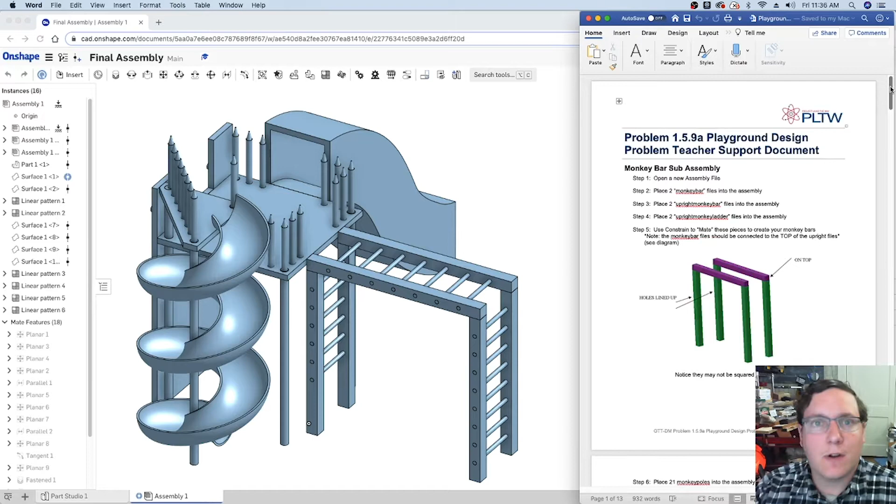So we're going to start off with some notes about the assembly document itself. We've been working our way through this with the subassemblies of the different main components, and while we've largely been able to follow those instructions, we're getting to a point where the assembly process for the final portion in OnShape is going to be a little bit different than what we've used with Inventor. Some of the commands are a little bit different, and some of the order of operations may have changed a little bit.

So again, I'm doing my best to go ahead and use OnShape for the final assembly, and I'm still going to keep the document up because it does provide us with details like the offset distances and the general layouts that we need to follow. So even though the constraints may not be the same, the general process will be, so just be mindful of that as we move forward.

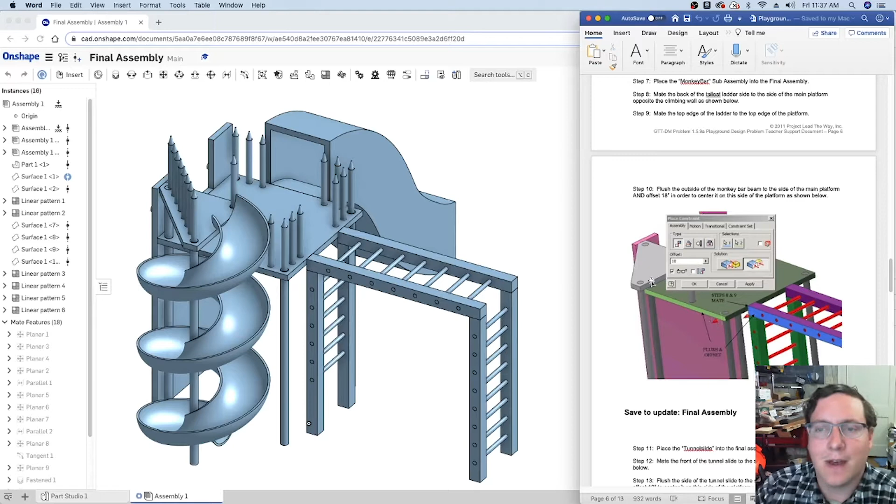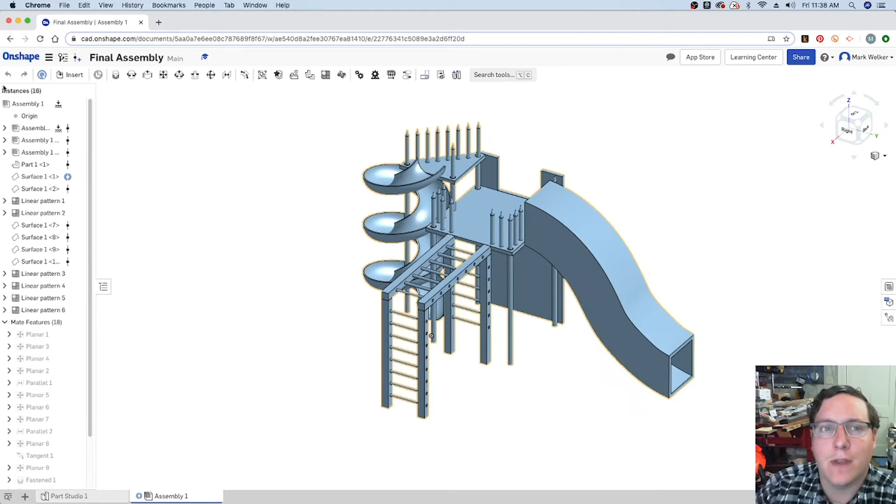As you can see, I've already done one run, and it does take some time. I think one of the things I'm not a big fan of in OnShape or Fusion 360 compared to Inventor is the assembly process is a little bit more finicky, a little more problematic. As you can see, we've been able to go ahead and do the full layout. We've got the crayon poles, all of the pieces are pretty much locked in place, but we're going to try and cover what needs to happen for that to go ahead and make progress.

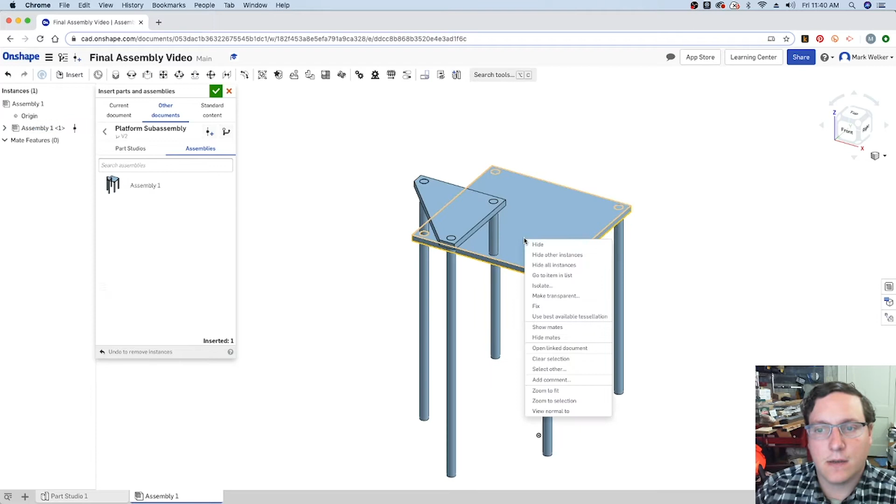So I've already started an empty document for the final assembly for this video. We're going to go ahead and start adding in our parts. Remember that we're going to go into the playground project, grab the platform subassembly, place it, right click, fix it in place, and then we're going to step back and grab the wall subassembly to go ahead and place that component next. Now we'll add other subassemblies as we proceed forward, but this goes ahead and gives us a good starting point.

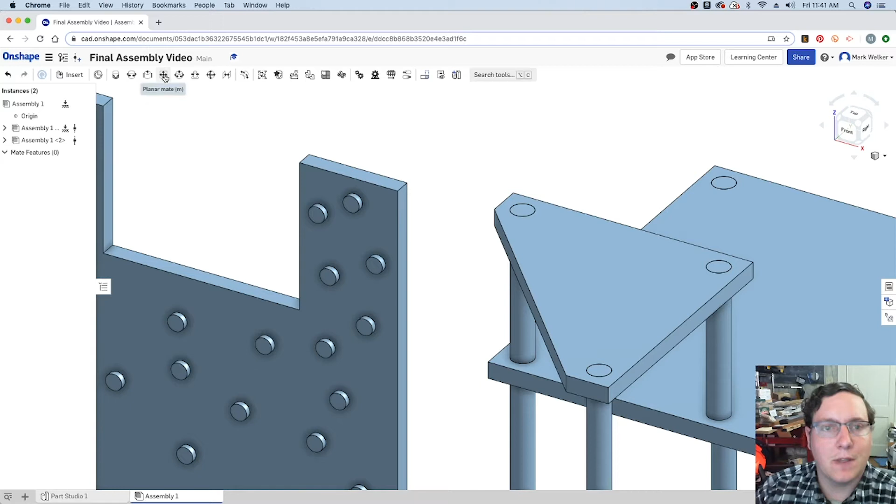So the first constraints that I think I'm going to use are mostly going to be the Planar Mates. So we can grab the top section and go ahead and line it up with the platform. Solve the problem, check your orientations. Sometimes you can flip it around, and it's going to move things for you.

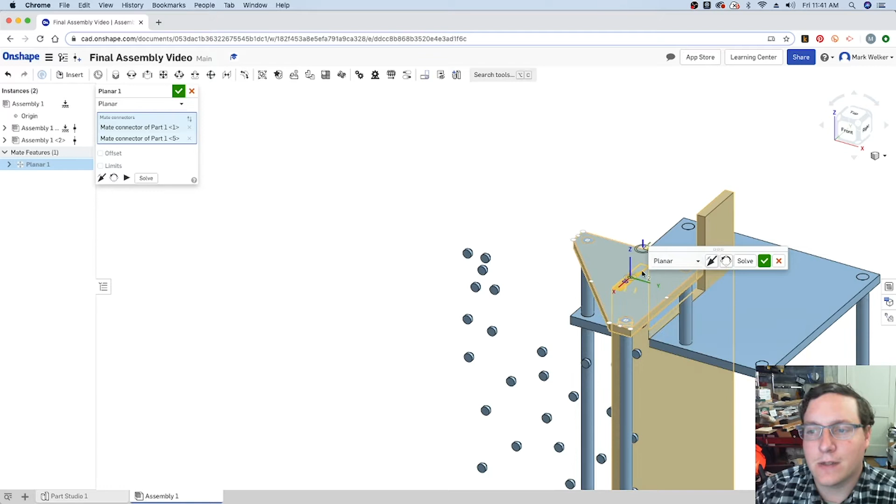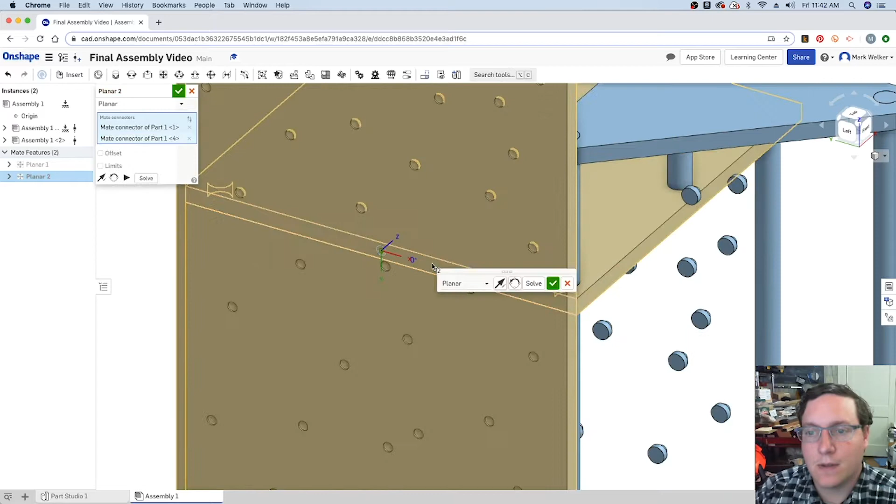I'm going to go ahead and start setting it up so it's easier for us to proceed forward. So we solve, it rearranges some of the other sub-assembled pieces, and then we can go ahead and say that I need the back of that platform to be flush, or at least joined up to that edge of the platform. Let's see if we can solve it. It goes ahead and rearranges a little bit, and let's see, we're not quite there. Okay, actually, are we? Yeah, that looks like it's pretty much set up.

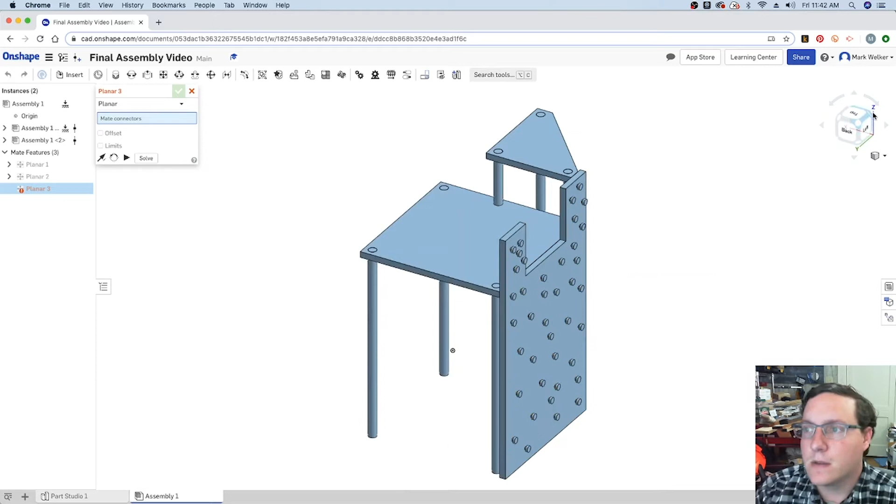Okay, so go back to our primary home view, and we'll go ahead and close that up. One of those things to make sure you're checking is click and drag to see how you can move the part. In this case, we were able to move the part, so we're actually not quite finished.

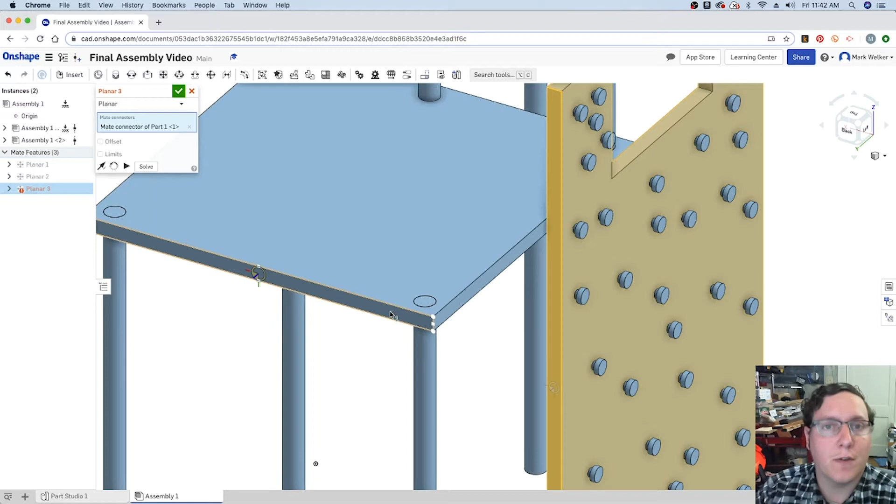Okay, so one more planar mate. We've talked before, ideally with your planars, with all of your constraints, you're usually having to deal with all three directions. Let's see if we can solve this, have it work out. That's looking good. We can now escape out of that, click and drag, and that is now fully constrained.

Okay, so get back to our home view. We'll go ahead and save this because, as I've mentioned, there are problems just with these assemblies. So make sure you have a point where if it really goes wrong, you can escape out, not save it, and go back to the previous versions. The history that they provide us with is going to be really useful when you have those issues pop up. So rather than having to undo or just start over from scratch, you're able to go ahead and step back to where you knew it was working.

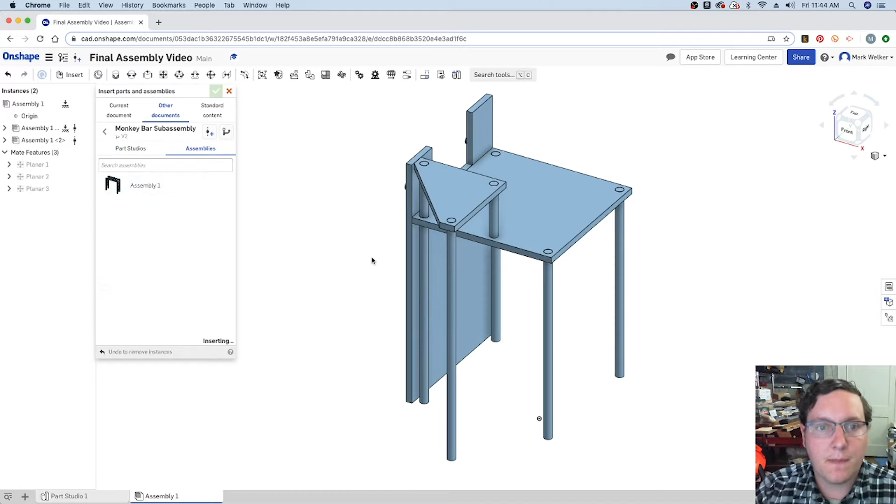So with the wall taken care of, let's go ahead and step into grabbing the next piece. So out of the playground project, let's go ahead and grab the monkey bar assembly, and we'll place it.

We're going to repeat the process much the same way we did with the wall, except there's going to be a little difference in terms of getting it centered. So we'll start off with planar — top of the platform we know is going to get parallel in line with that. Solve, make sure the rest of the assembly is doing all right.

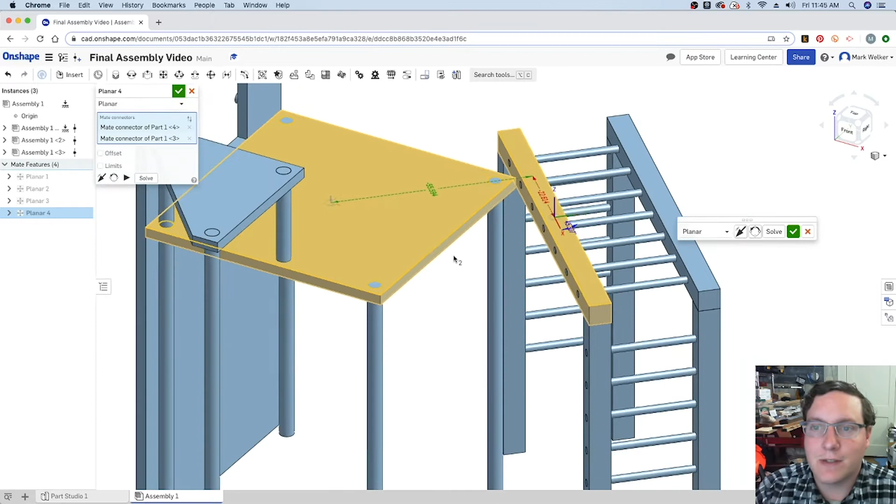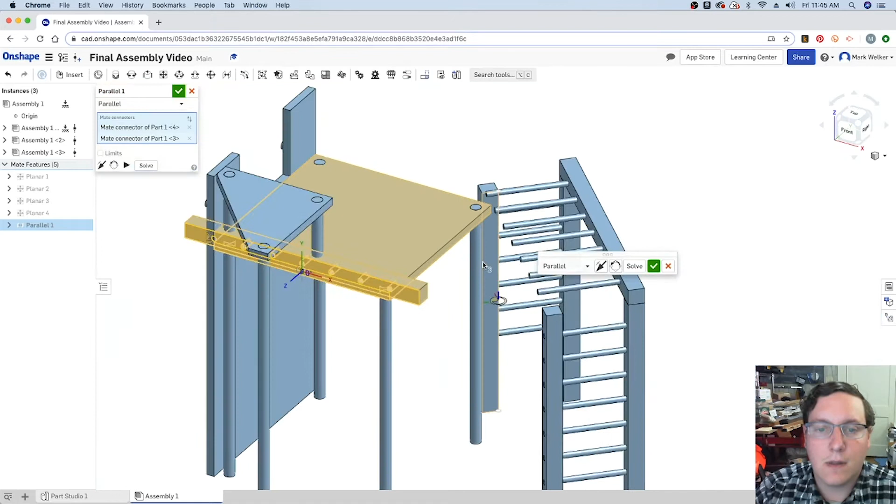In this case, I'm okay with this because one of the next pieces we're going to use is actually going to be the parallel mate. So parallel, we want this edge, the forward edge, to be parallel to the monkey bar itself. We'll try solving that, seeing if that works. And what that's going to let us do is deal with some of those distances — we can tell it what offset we want in this circumstance.

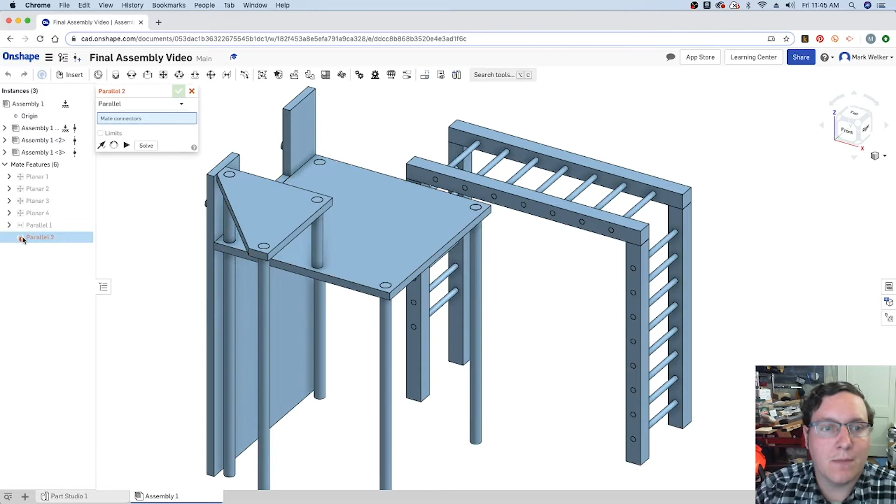I'm going to come back to that one in a minute. The last one, the planar mate, we know we need to have these edges touching this edge of the playground. So we can solve, we can go ahead and check — that seems to be working right.

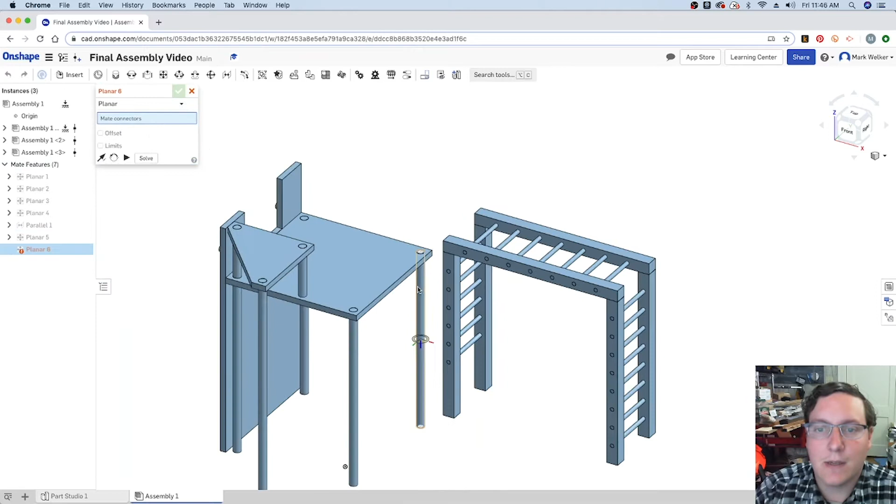And then we can go back and actually change the dimensional distance. So where that's going 82 inches across, going past the platform, we can now tell it that that's only going 18 inches. One of the details in the technical drawings tells us that is now going to pretty much center the monkey bars to that platform.

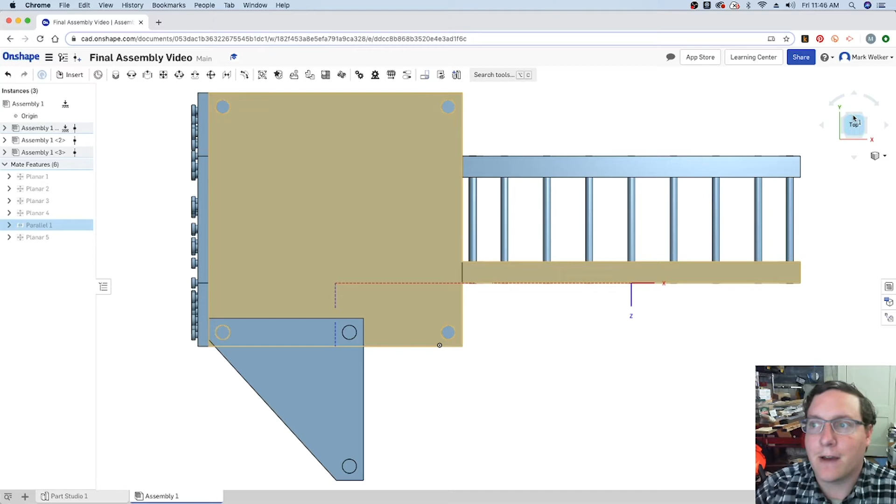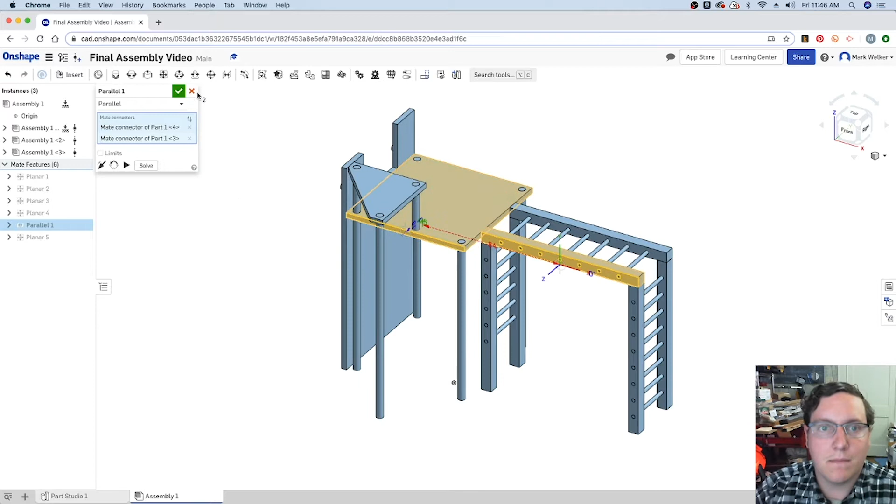So, as before, go ahead and save a current version. We know that's going to hold us in place. And that monkey bar, again, that 18 inches — may make sense to go ahead and lock that in place in other ways, but knowing those distances is going to be a good starting point.

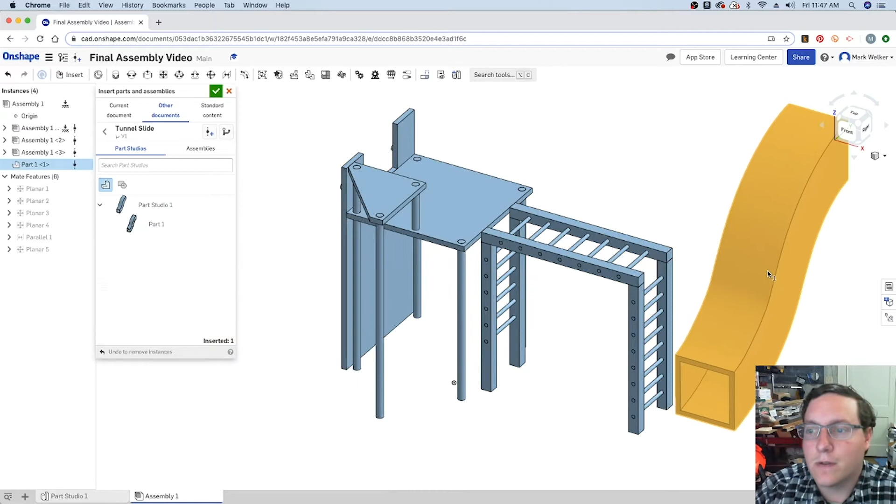So, next up, in terms of our files, let's go ahead and do the tunnel slide. Let's place the part. It's going to be a little bit backwards from what we actually want, but we can go ahead and start applying the constraints and let it do the work for us.

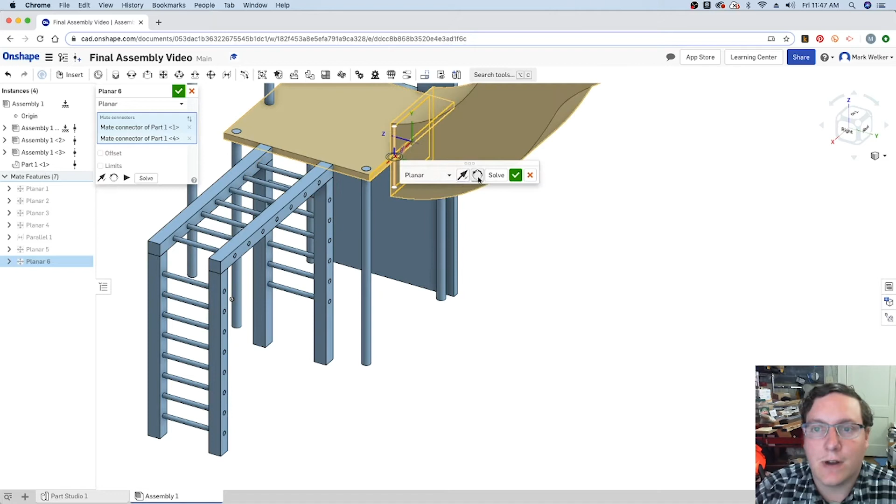Again, our planar tool — I think that's one of the main constraints I'm using for a lot of this. We can tell it to snap in place, change the direction. Now keep in mind, once you've got it kind of glued together, you still need to take care of other orientations, so give it some guidance. It's not quite as intuitive as Autodesk Inventor can be.

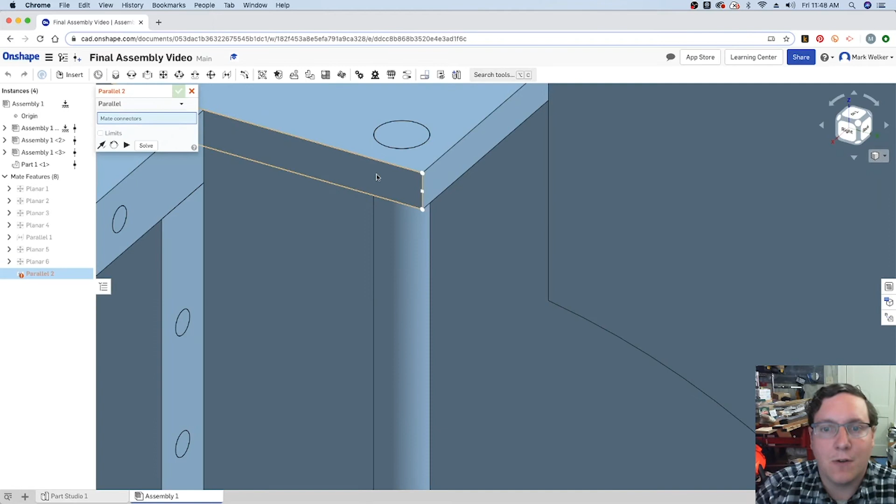So we've gone ahead and put that in place. We now need to take care of a couple of other factors. So like the monkey bars, we want it to be centered. So with the dimensions we provided, grabbing a far edge and that, go ahead and solve.

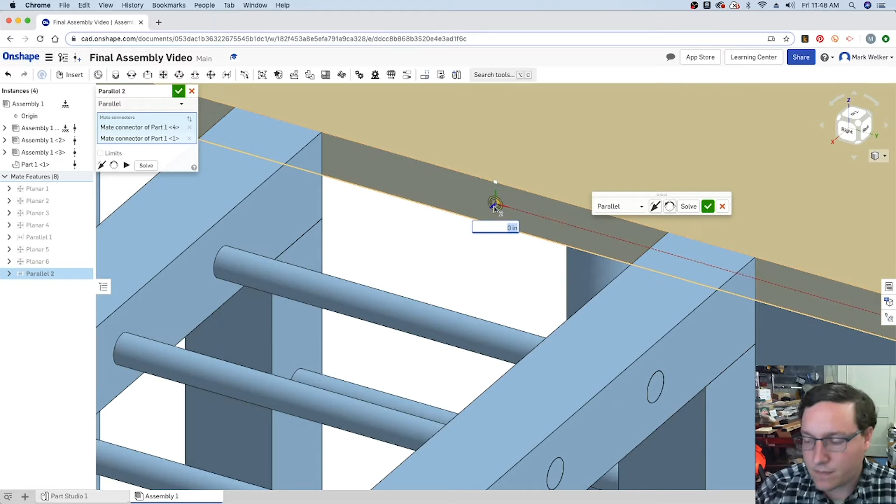Set that to 18 inches as well. Hit OK. And then what's left, we can look from the top view and we can see that that's centered. But as you notice, it's still a little separated from where it should be.

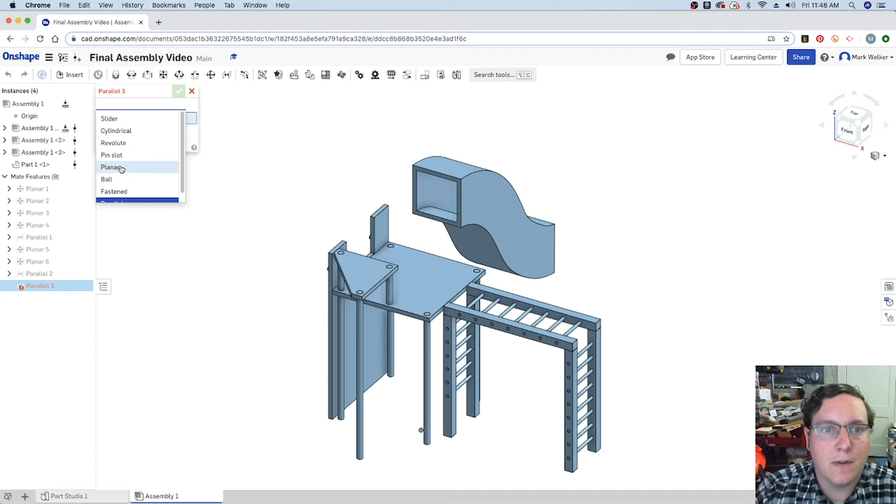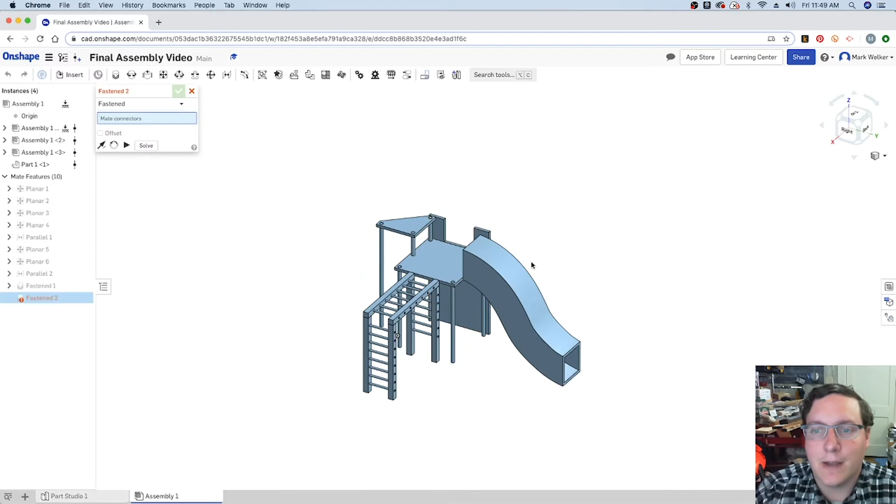So for here, let's change up to — I think the fastened constraint is going to help me out the most. We'll go ahead and grab the bottom edge and then tie it to the bottom edge. This is a little bit more powerful of a constraint, but as we solve that, we should now be able to hit escape, clear out the tools. Notice we can click and drag — it's not moving.

So once again, save the file, save the version, and then we're going to go ahead and install, or at least input, the last of the main components with the spiral slide.

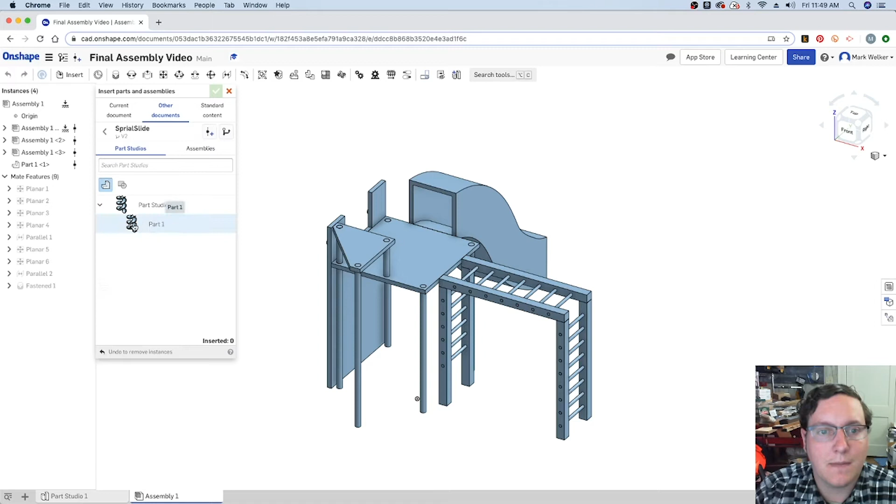Now, from what I was working with earlier, I think the spiral slide is going to be one of the more challenging ones to get everything to line up. So where we'll start is the same way we've started before.

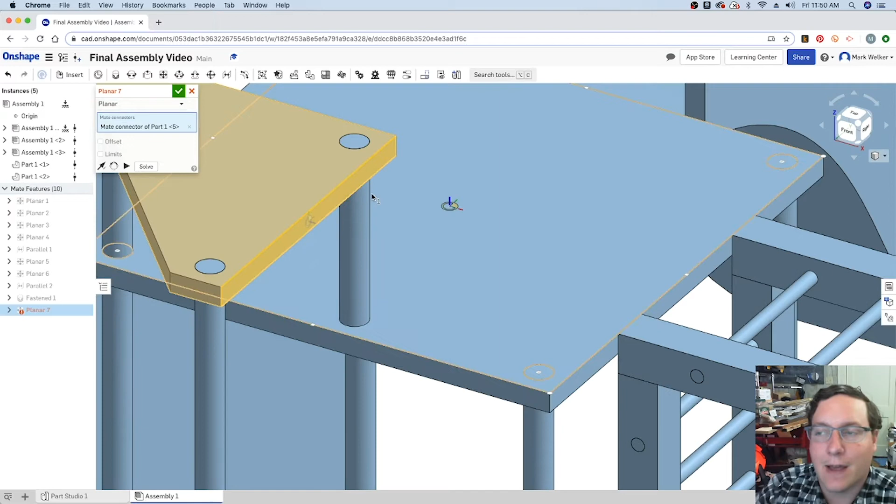We'll grab the planar mate. We'll tell it that I want it to connect from that flat edge of the upper platform, rotate around until I can see it, to kind of the front lip of the top. Okay, so solve. It looks to be holding into position. We'll go ahead and lock it in there.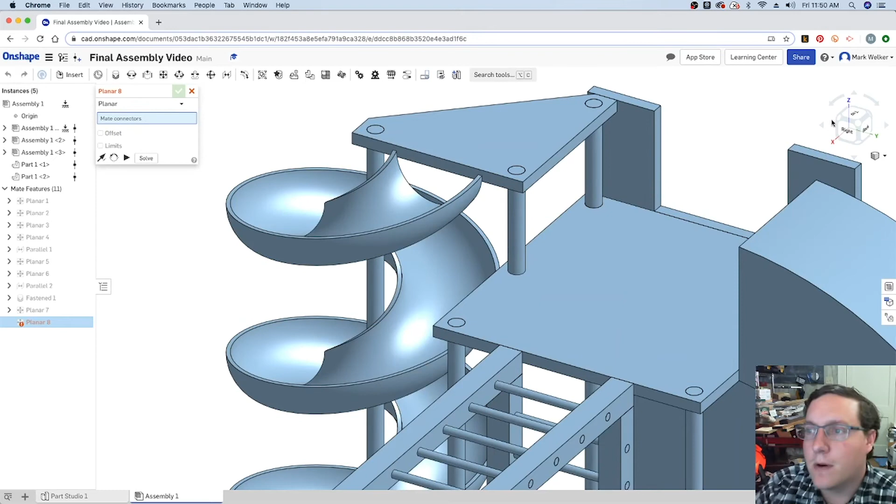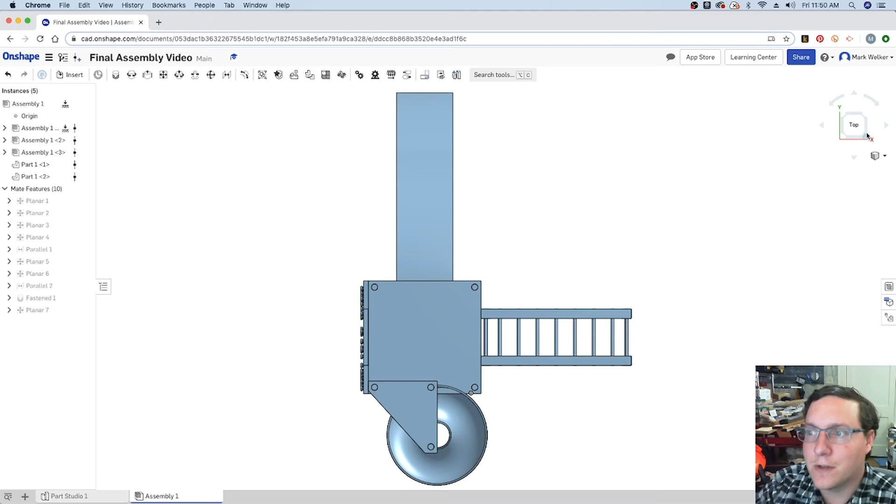But what's that leaving us with? We escape out of the constraint. We've got a lot of movement we can still do. Now we look from different angles. We can see we can move it back and forth, up and down from that orientation. And we can't move it left or right, so that first constraint we put in is doing its job. But we can also see that we're moving up and down.

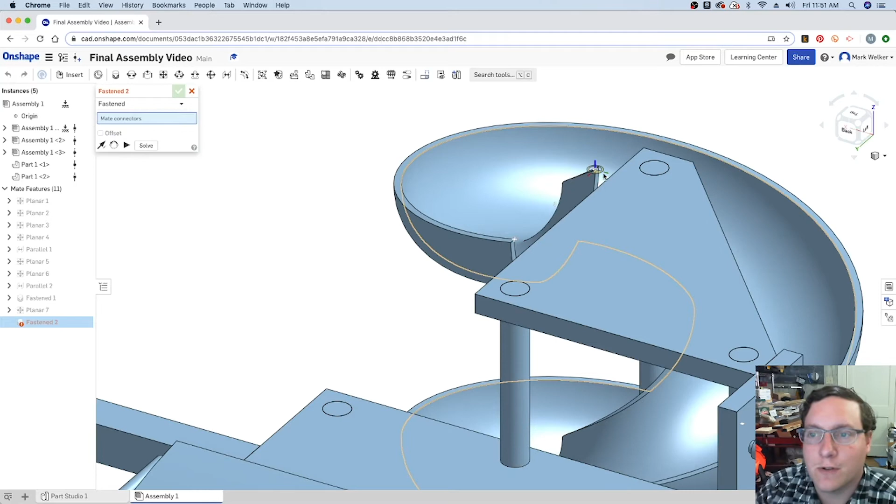Now, just because of some difficulties I've been having with this, what I've been doing is actually using the Fastened Mate, because it allows me a little more control in terms of the offset. So we're going to grab that. We're going to tell it to go ahead and constrain to there.

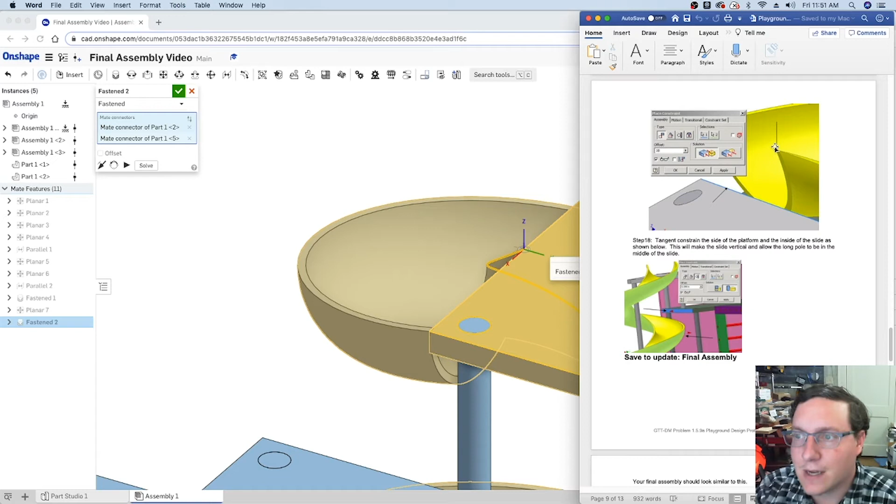And then I'm doing a couple of things. One of them is in the Word document. When we go down to that, we can see it tells us that the offset from that top edge to the platform itself needs to be 10 inches. So offset, pay attention to your orientations. We know that that's going to be 10 inches.

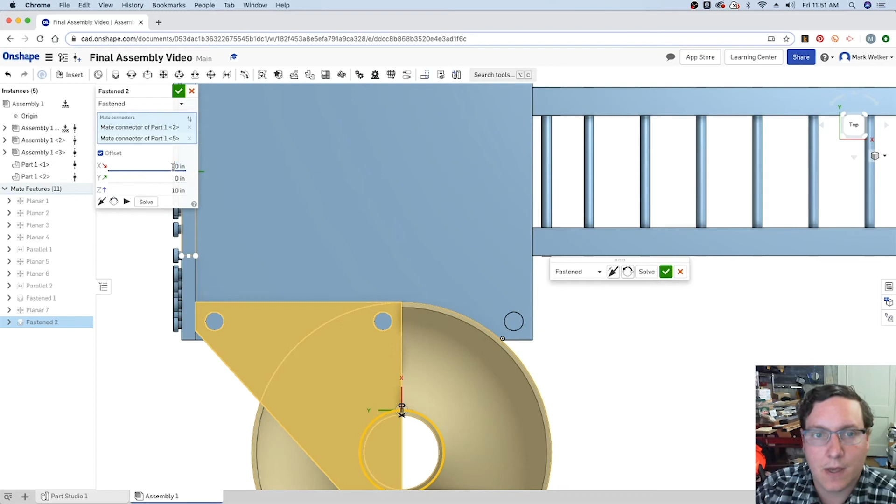But then I'm going to switch to the top view, and we know that we don't want the slide going ahead and rolling through that platform. So we're going to change our X dimension. We'll say, let's try it at 10 inches and see what happens.

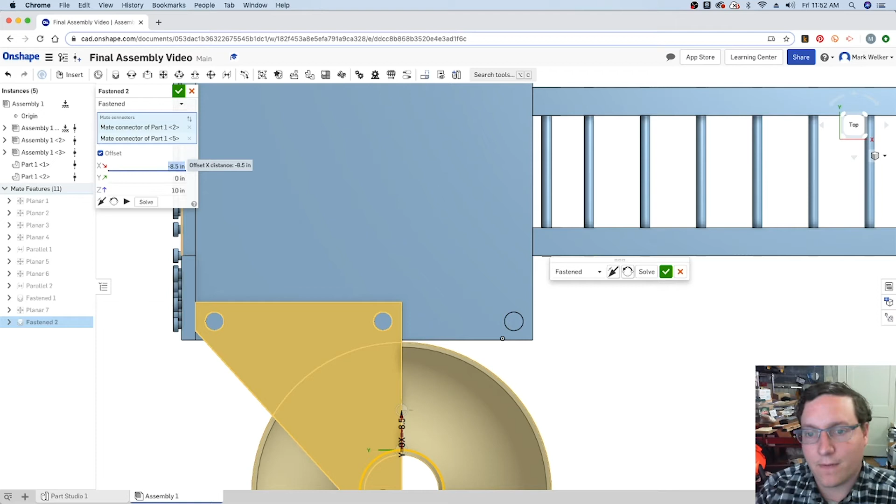So that's obviously going in the direction we don't want. Change it to a negative value. We're getting closer. But I had to go ahead and play around with this some. I think I ultimately settled on 8.5 inches is enough to go ahead and give us that clearance, so it's not going to be affecting that.

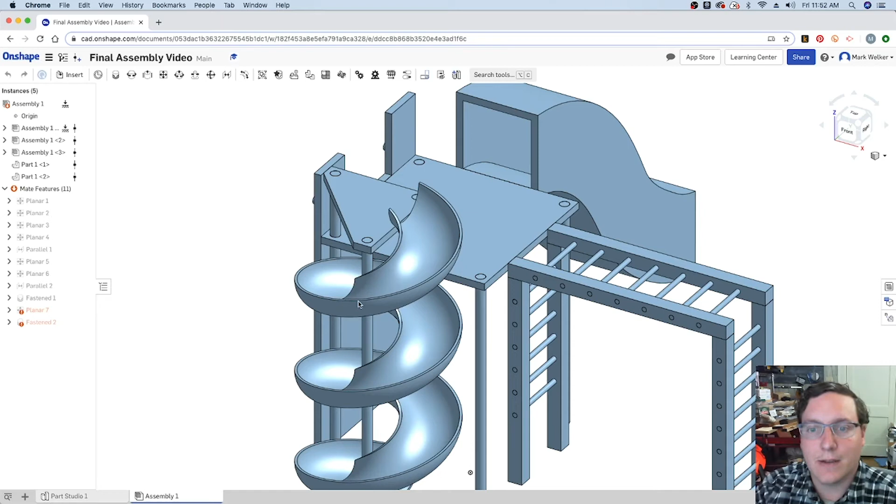We'll go back to a regular view, look at it three-dimensionally, and have that solved. I think that is now pretty much holding in place where we want it. Notice, click and drag, it's not moving. So, as always, save the work, make sure you're keeping track of it.

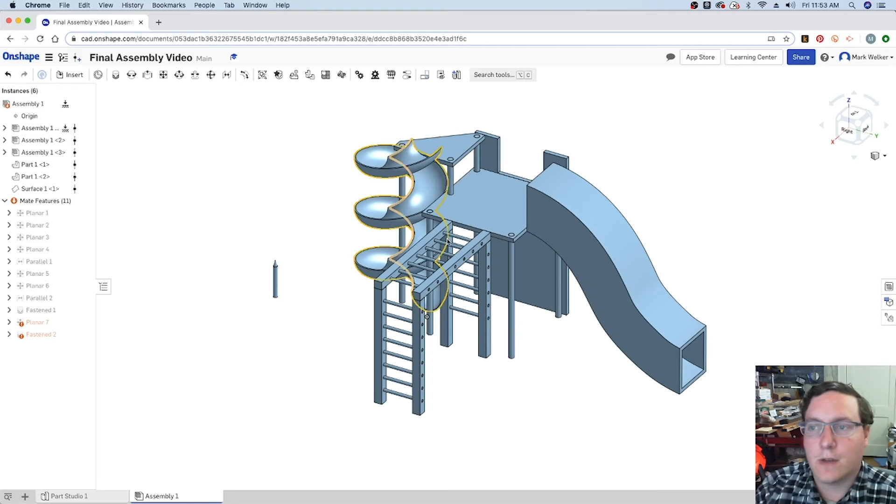And I'm actually going to place several of these. Actually, we'll just start with one. So make sure that it's good. And this is where I'm going to go ahead and use the fastened constraint to help us put it in the corners where we need those poles to be at.

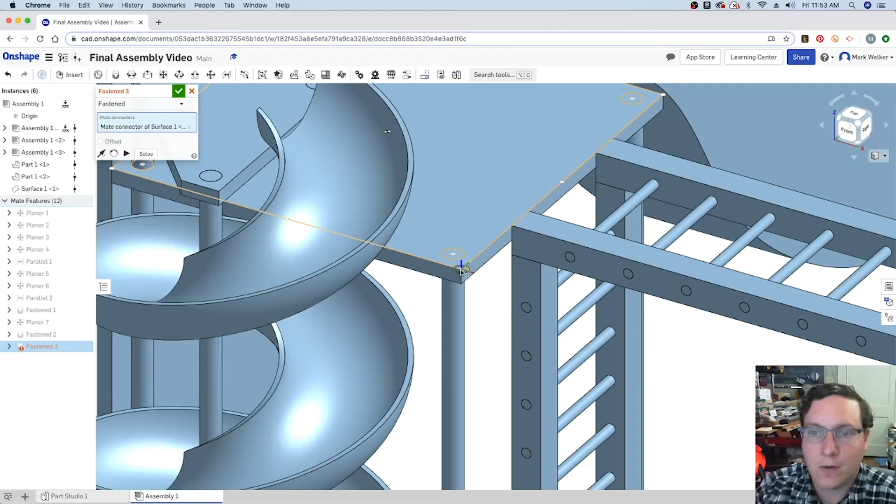So going in, grabbing the center of the bottom hole, or the bottom surface, and then I'm going to go ahead and reference it to the corner of the platform. From there, I can go into the top view, I can edit the offset, and when we go into that Word document, we know that we need to get it 4 inches in both axes. So we pay attention to X, so negative 4 inches to shift it to the left, and then 4 inches to go ahead and get it centered on the right.

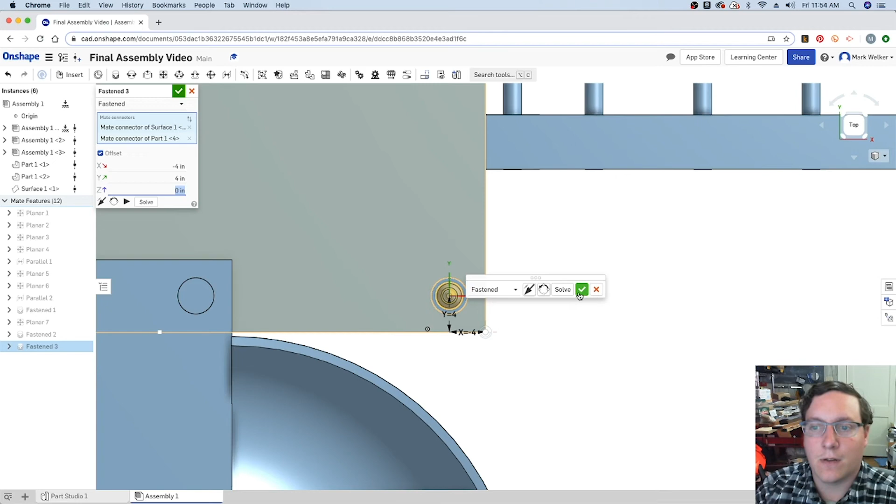When we look at our isometric view, we can see that it's in line because that Z-axis, the bottom of that pole and the top of the platform, are fitting together.

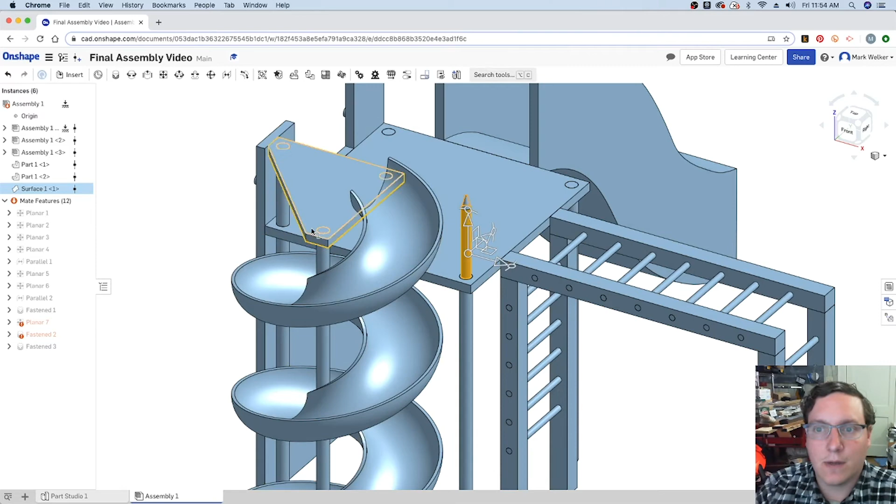So before I start doing some copying of it, before I start using some of the duplicate tools, I'm going to go ahead and copy this. So right click, copy surface 1, since that's the file name for it, and then I can start placing a few of those just by pasting it. So what we need is one in that corner, one in that corner. We'll need one along that edge, and one is there. So we still have to add 1, 2, 3, 4 of these.

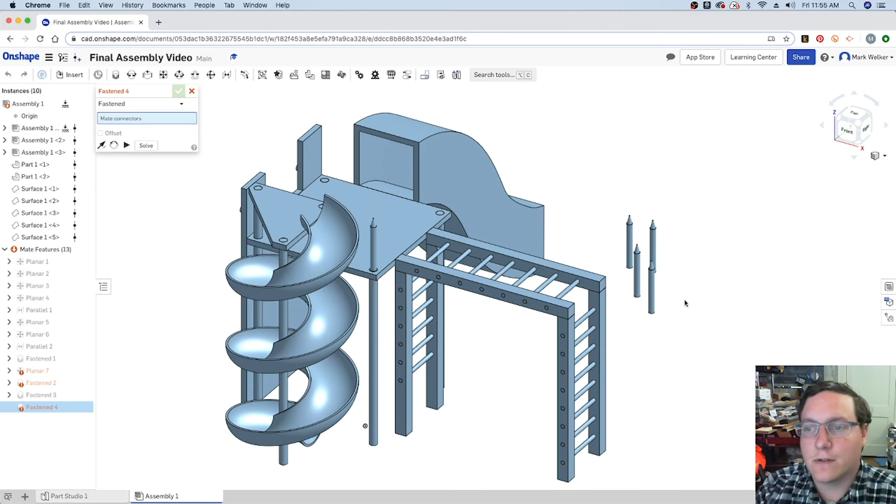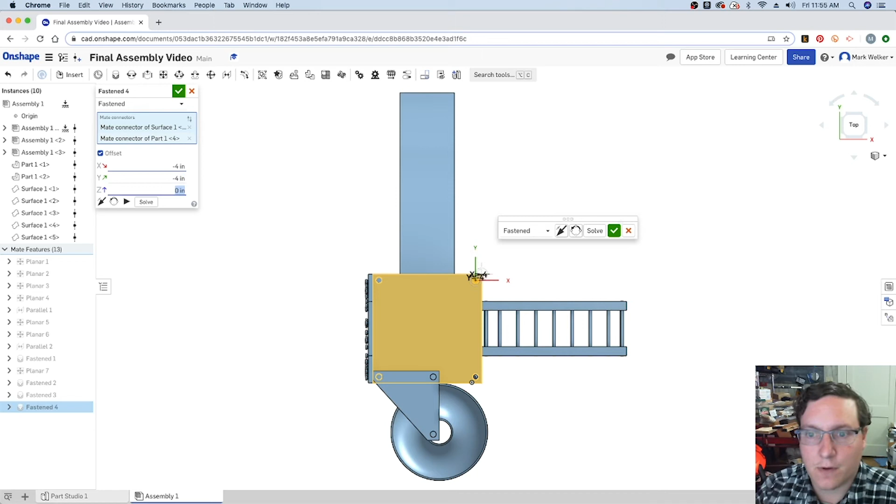Alright, so I'm going to go ahead and apply the same constraints. We're using the fastened to grab the bottom of the pole, go back to an ISO, place it in a top corner. Set the offset, paying attention to your axes. So in this case, we need negative 4 inches, negative 4 inches to go ahead and put it in position.

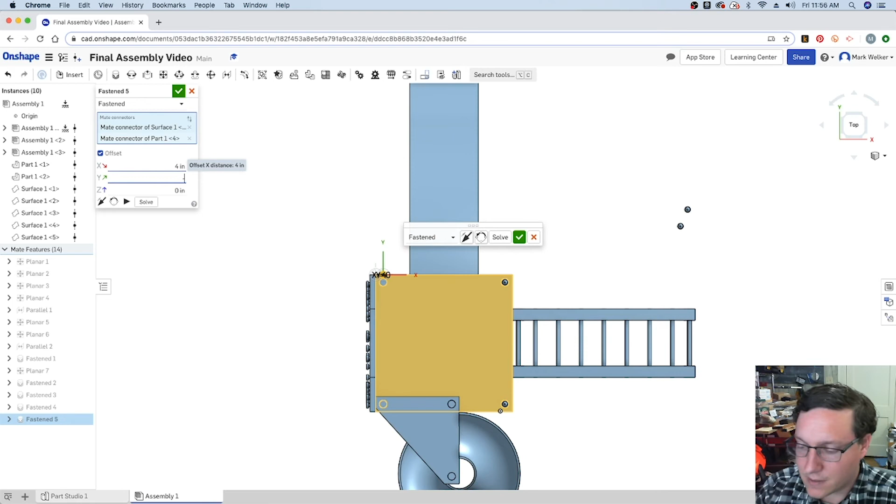Checks out, we can go on to the next one. So mate, pressing M to go ahead and use a shortcut. And again, keeping track of the offsets that we need. In this case, X needs to be 4, Y is -4. Okay, we can solve it. Looks good, we're able to go ahead and move forward to the next one.

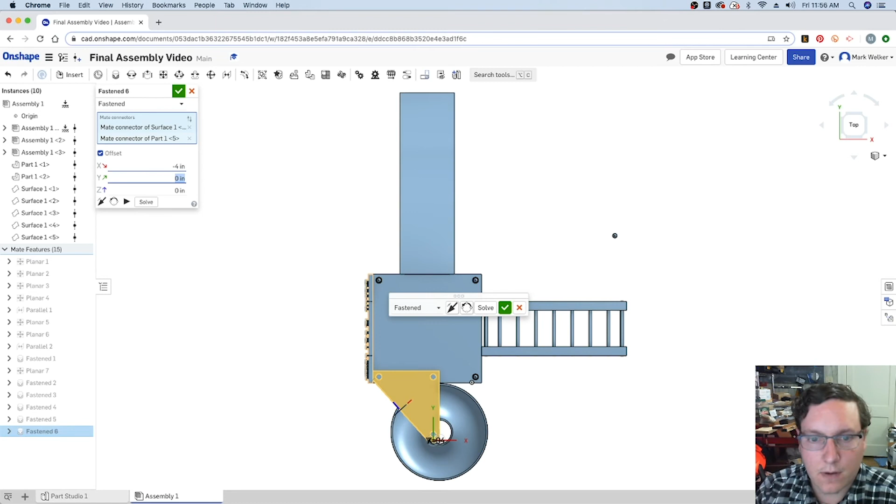Okay, so grab the mate, grab the bottom, hit the corner, and check your offset. In this case, X is -4, Y is 4, okay, and we're able to go ahead and move forward.

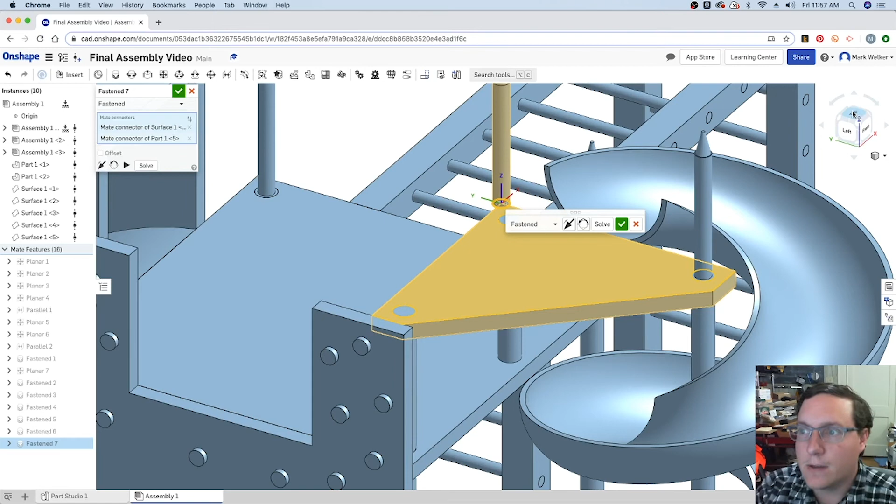Last one, grab the bottom, switch up, and change the rotation a little bit so I can get to that corner. And then using top, again, pay attention to your orientation and your directions. For the offset, -4 and -4.

So with poles placed in each of the corners, this is where we can go ahead and start using the assembly patterns to go ahead and set the directions. So I grab it, the instance is the first object we want, direction, I'm going to go ahead and use the lines that are already created.

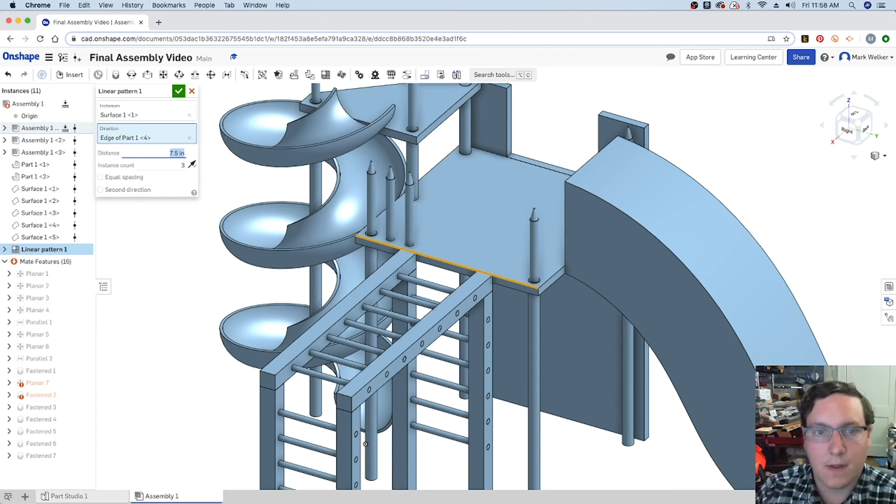According to the documentation, we need 7.5 inches of spacing between the poles. We can change the direction, and I'd say let's try 3 poles at that location. That looks good. And then we're basically repeating the process along all of the axes that we're going to care about.

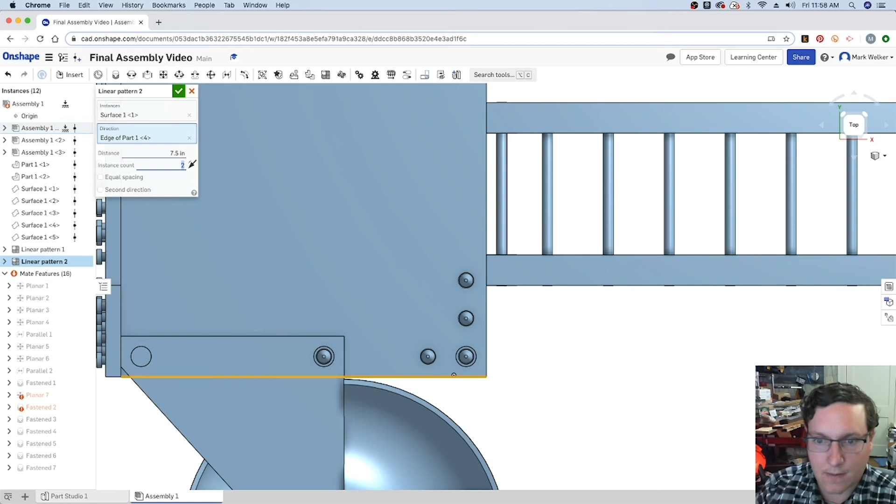That same pole that I just grabbed, grabbing the pattern again, direction, changing the axes. You can use the top view to help see how far it actually needs to go, but 7.5 inches, and I should do 3 to go ahead and max that out.

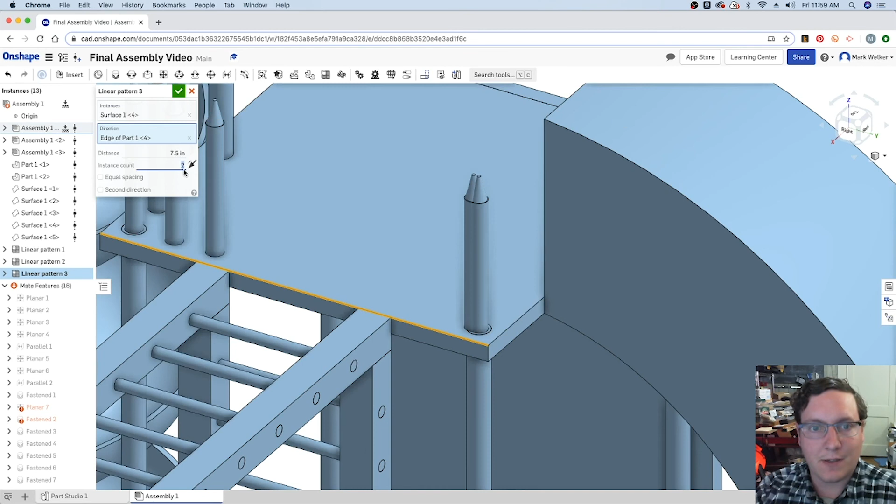A few moments later, kind of continuing the process. We can go ahead and grab a pole, tell it that we're doing a pattern, set a direction, 7.5, and I'm going to go ahead and copy that so I can just paste it in the future. 3 in that direction.

Same pole, same pattern. We can go ahead and set the direction and paste the distance, and then let's say 3. How does that look? Okay, yeah, I think that'll work.

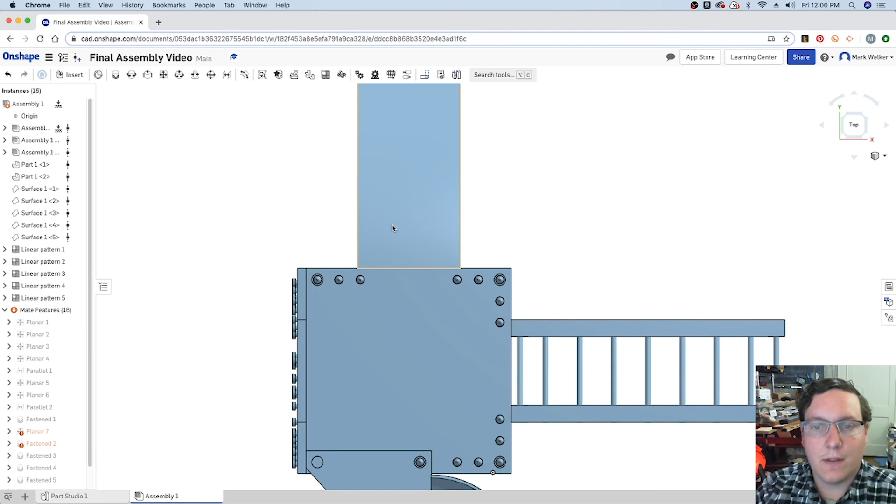Now you can actually do some of this from the top view as well. You know you're grabbing an instance of the surface, you can set the direction, change it as needed, and 3. Now the downside to this is it's very hard to go ahead and kind of repeat it across all of the platforms, all of the pieces.

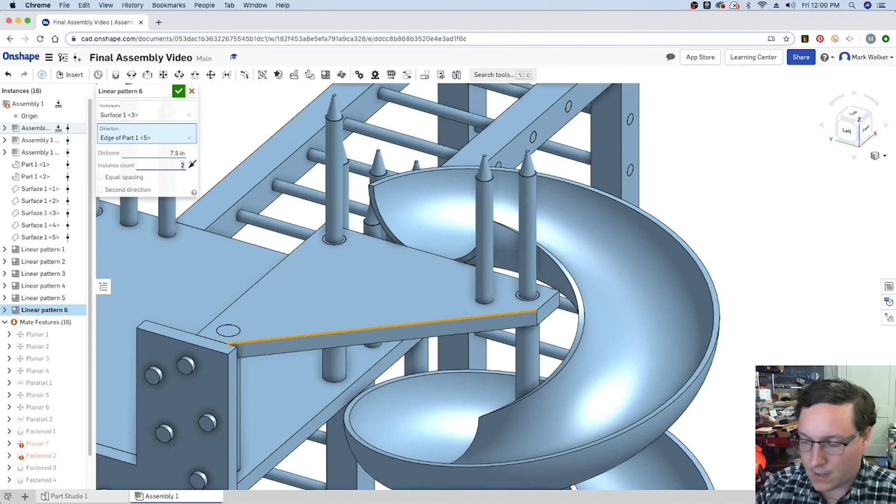But as we get down to it, we know that we've got an instance here, we can go ahead and grab the pattern, and it works along diagonal distances as well. And if I remember right, 8 looks good. Again, some of this is kind of playing around and guessing your way through it. But as you can see, we've now been able to go ahead and take care of the full assembly.

So definitely be mindful of the variations between the different mate constraints. They are a little bit different than the documentation covers. Onshape, I think, is a little bit more finicky. And obviously you can see that there are a couple of errors that I'm going to have to address later on. But do your best to go ahead and work your way through the assembly process, and when you can, copy and paste instances of the different parts and use the assembly patterns to go ahead and help make it a little easier, save you some of the same steps.

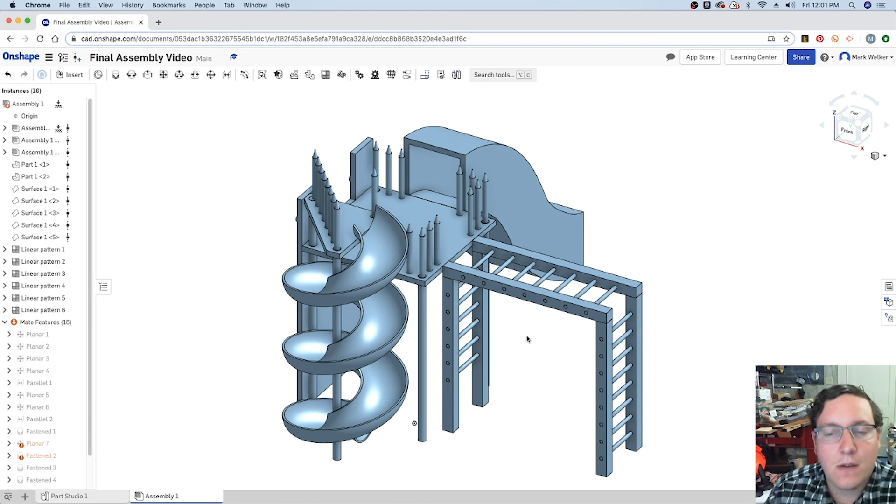So best of luck, and as you need help, certainly let me know. This is definitely one of the more challenging parts of this project, but once you've got that, you're pretty much done, and the only things left are small details like trying to add color or texture to the parts. So best of luck, and like I said, let me know if you need help.